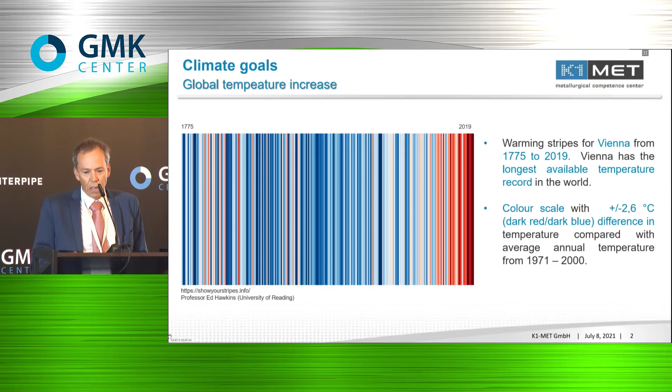We have already agreed on the Paris Agreement 2015 that we have a clear climate target. We would like to limit the temperature increase to 2 degrees in comparison to the temperature level before industrialization. And there are also action sets from the political side. This is the European Green Deal in 2019. This defines that Europe has to be transformed CO2 neutral, no greenhouse gas emission until 2050.

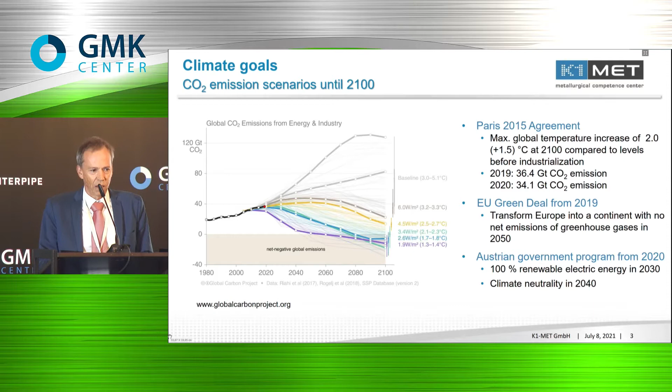And if I look at now our own country, the Austrian government launched a program last year, 100% renewable energy for the electric energy production in 2030 and climate neutrality already 2040. And this means, of course, for the steel industry, we have to act, not react. We have to act, and we have to do something.

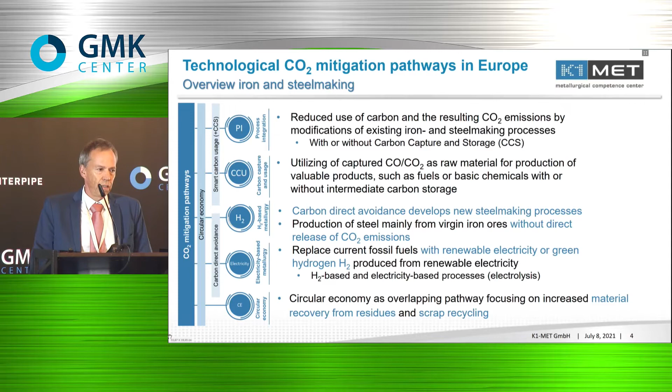from the steel industry. And I will now keep my focus on hydrogen, using hydrogen, in particular on technologies which are not now available at industrial scale, which have a technology readiness level below 7-8. Also, there are activities about using electric energy directly. An important topic for me is the circular economy. This will definitely be a very important topic for meeting the CO2 targets, especially in the next 10, 15 years. That means recovery from residues, increasing the scrap rate. This will be the topic.

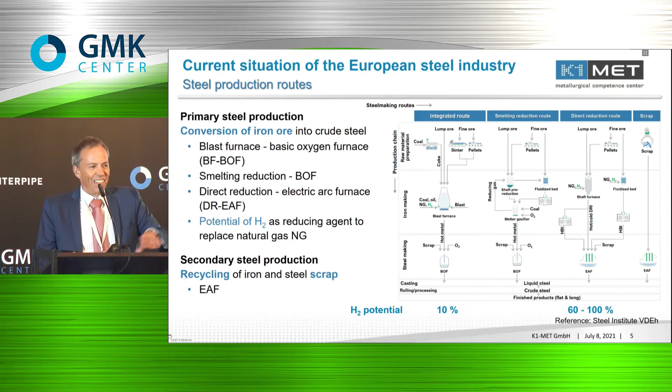And this now brings me to the issue. What are the topics we have to face? Because we as the steel producers can do it, but what we need is production. We have to produce hydrogen, and we need electrolyzers to produce hydrogen from water electrolysis by renewable energy. It should be CO2 free. That means we need renewable electric power. Hydrogen production from biomass would be an alternative, but I think it's quite limited to consider it for the steel industry, because this is quite a huge amount of biomass which you need.

A further topic already addressed is definitely the storage of hydrogen. This includes gaseous storage, it includes liquid state storage. There is a lot of research going on, but this is a topic which is not solved now. Especially if we look at the demand of hydrogen for the steel industry, smaller storage is available, and if you think about traffic, the storage is solved, but not for the steel industry.

And distribution is a further topic. We have to distribute, we have to supply the hydrogen from the production to the steel plants. And we have to deal with it, we have to compress it. These are the topics we are focusing on if we speak about hydrogen use in the industrial sector in the size of the steel industry.

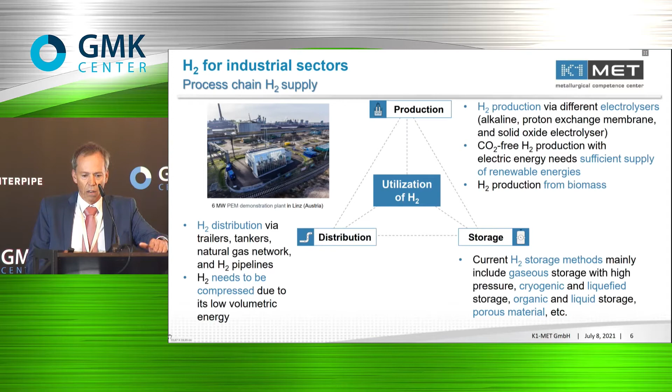Okay, but I'm representing K1-Met, and K1-Met is already active in the production of hydrogen. There is one pilot plant, it's a flagship project from Europe.

It's called H2 Future. There's a pilot plant at the voestalpine site in Linz. This is a so-called proton exchange membrane electrolyzer, which has 6 megawatt power and is producing 1,200 cubic meters of hydrogen. Partners are Verbund, the Austrian electric power supplier, Siemens, Austrian Power Grid, K1-Met, TNO, as we heard before, and voestalpine are the members of this

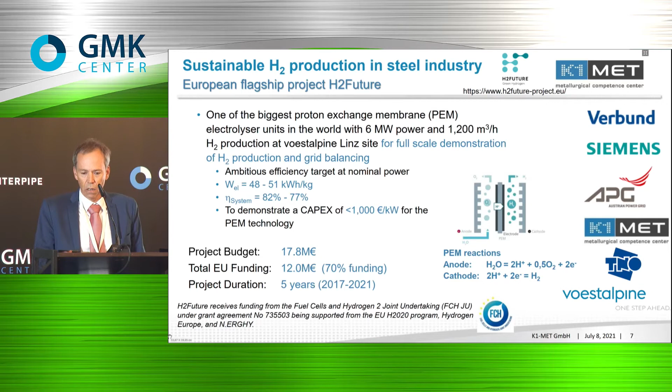technology. The aim is to demonstrate the operation of this PEM electrolyzer in the environment of a steel industry, which should also simulate the different supply of power from the grid, meaning typically fluctuating power supply from the grid due to renewable energies. And this was quite well demonstrated. They could run stable operation between 1.5 megawatt up to 9 megawatt.

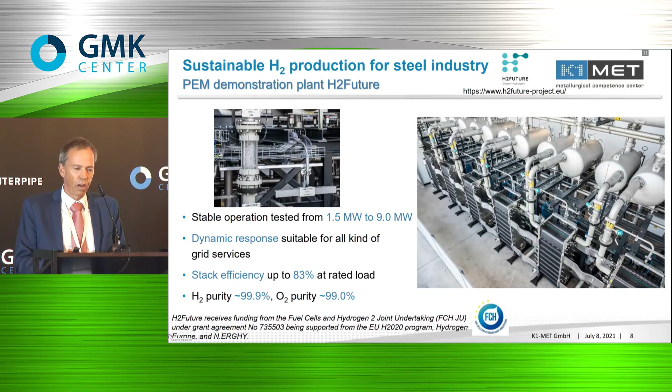And what was very astonishing for me is the good efficiency they achieved, more than 80%. The target was about 80%; they achieved 83% as a stack efficiency. And the purity of the hydrogen is also excellent, as well as of the oxygen. This picture was already shown before, mentioned in the previous session.

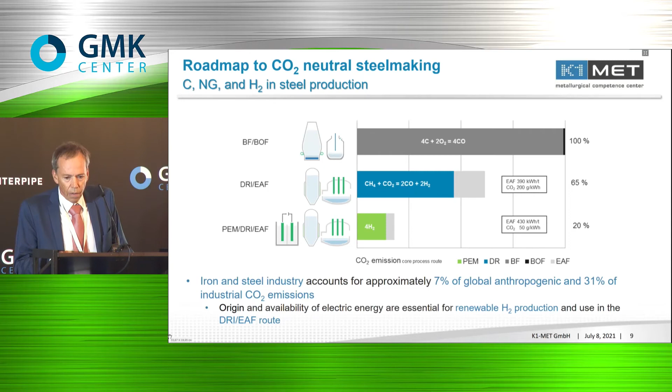You start with the iron ore, then you convert the iron ore in a blast furnace to hot metal with a significant amount of carbon, up to 4.5% carbon, and then later you go to the basic oxygen furnace to remove the carbon and make crude steel out of it. It's a two-step process.

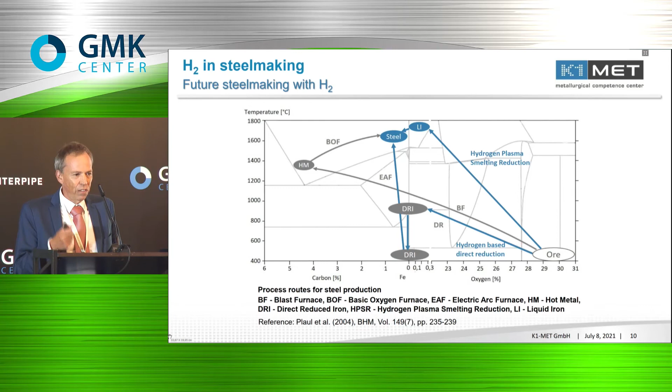What is available now as an alternative is the blue line. It's hydrogen-based direct reduction. It converts the ore to so-called DRI, direct reduced iron. And this direct reduced iron you then melt in an electric arc furnace to steel. This is what is available nowadays. But the future, and this is why we use hydrogen, is that you can go directly from the iron ore to steel in one process step, and we can avoid these two steps which we have now.

And this is a topic we are researching in the so-called SuSteel, or sustainable steel. This is a hydrogen plasma smelting reduction technology where we use ultra-fine ore, pellet feed, which we reduce in ionized hydrogen. The advantage is that ionized hydrogen is a very strong reducing agent, much stronger than carbon, and we can produce steel in one step. It is already demonstrated that it's working. This is a breakthrough technology.

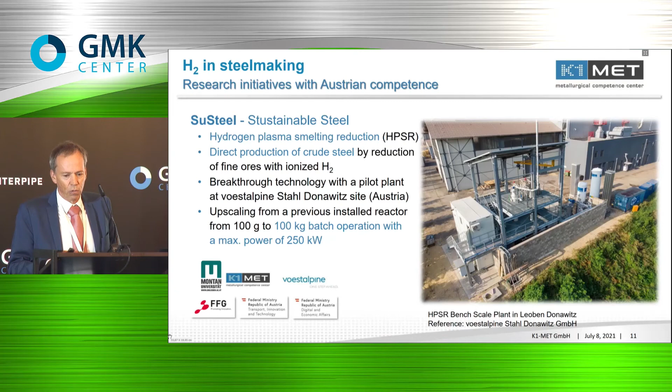We have a pilot plant at the voestalpine Donawitz site. This is a consortium where K1-Met, voestalpine, and also the university in Leoben are involved. We are still at a small scale. The technological readiness level is around 4 to 5. That means we need additional years to come to maturity, but we think this will be successful.

Another technology, which Mr. Petermeier already introduced, is the HYFOR technology, hydrogen-based fine ore reduction. The lead is Primetals, but K1-Met, voestalpine and the university in Leoben are also involved. They already demonstrated that they can produce DRI from fine ore, pellet feed fine ore, so you also avoid the agglomeration step here. They are also running this pilot plant at the voestalpine site in Donawitz, and are now doing tests to get the basis for the next scale-up step.

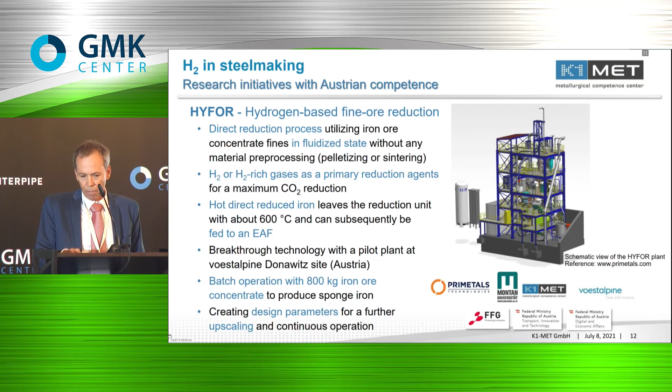What can you expect in the future for introducing hydrogen-based steelmaking? I think it's the last, yeah. Nearly last. This is the challenge we think about. This was already, I think, presented before.

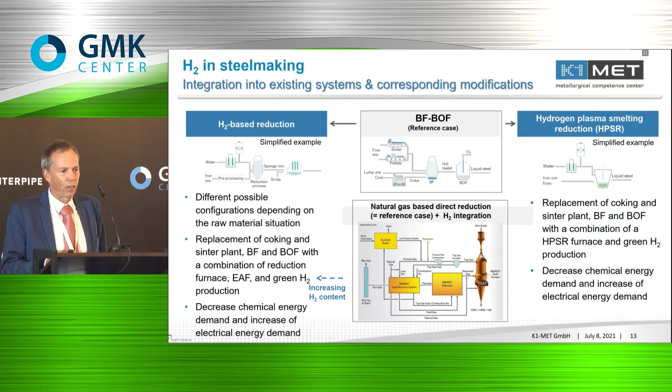We start with the implementation of natural gas-based direct reduction, and then we can switch over stepwise to 100% hydrogen. But the alternative, maybe a vision for the next 15 years, is to install instead of the integrated route a one-step process based on hydrogen plasma smelting reduction. This is what we think.

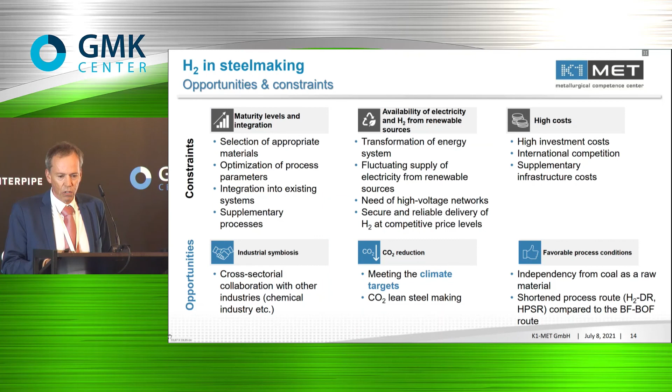I will not explain this slide because all the topics about the future challenges, opportunities and constraints were already discussed. This summarizes what the speakers before already mentioned. There are constraints, but also opportunities. We see strong opportunities with hydrogen in steelmaking.